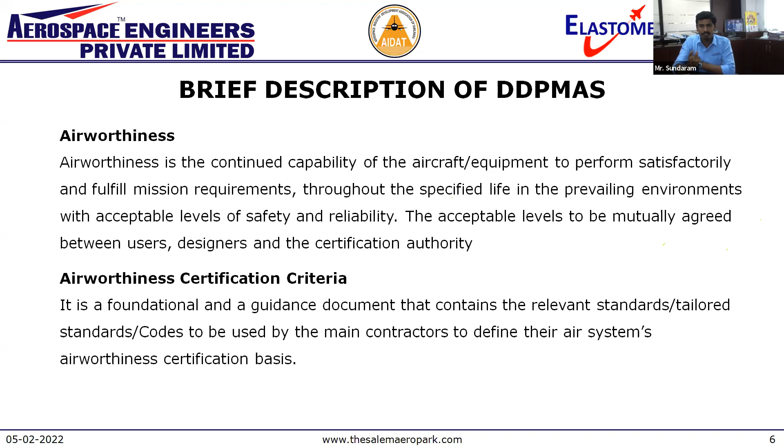The certificate of airworthiness concerns the system of individual air systems and their own certificate. For example, we are developing a product like an O-ring according to customer requirements, designing it based on drawing or raw material requirements. According to that, we do the qualifications as per the requirement, and then the certificate of airworthiness (COA) gets approved.

Continued airworthiness involves the task of carrying out verification of the continuous process, like type certificates. Subsequently, the organization must continuously fulfill the requirements while maintaining the approval. From the end of the approval, they must continuously follow the quality requirements of the military. Whatever customized standard we developed, according to that we must fulfill the requirements - that is continued airworthiness.

Airborne stores refers to aircraft, helicopters, engine systems, as well as equipment etc. for entire development and production. This includes the air engine system. Airborne store is a basic requirement for entering into the defense sectors.

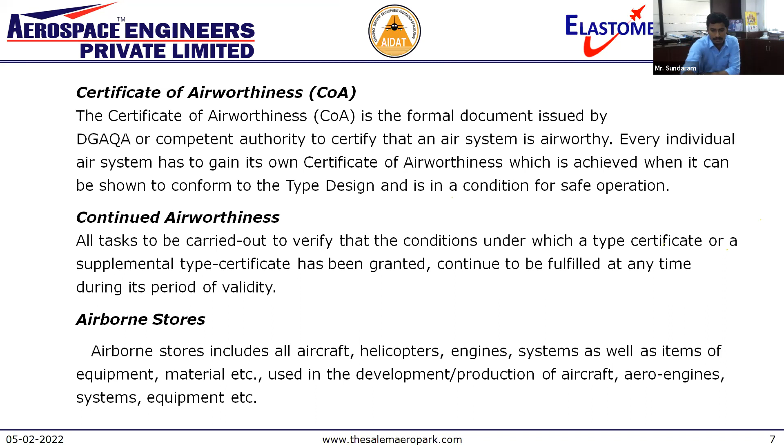Design and development agency - for example, our organization has a design and development agency for the military. We develop n number of components, both critical and non-critical products of aircraft, air engines, and software. We develop these based on customer or standard requirements, and we qualify them through the regulatory organization or R&D laboratory. As per the civil requirements, we qualify our item according to the development, and based on that we get the approval.

Design authority is majorly for R&D establishment. For the items that we develop, the design authority should be provided by RCMA or CEMILAC.

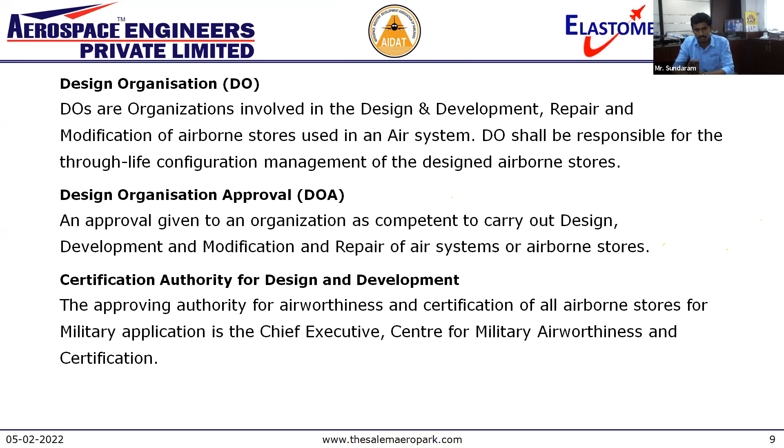Design organization - our organization is a design organization for the military, and that approval has been given by CEMILAC. RCMA is under CEMILAC. The air system and responsibilities should be based on our development. Design organization approval is subsequently equal to design organization based on the airborne stores.

POA is production organization approval. In the military side, the production organization approval is given for manufacturing and repair. It depends on how the organization develops and fulfills the requirements of the customers or military, based on specifications and how they follow the systems. Yearly, 2 surveillance audits are carried out for the POA. The POA approval is valid for 5 years, with surveillance audits carried out twice yearly.

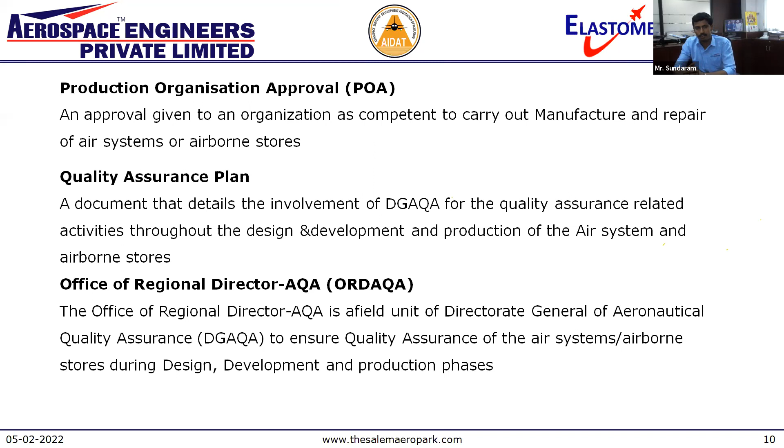Quality assurance plans are a major requirement for getting the military certificate, involving agencies like DGAQA, MSQA, and ORDAQA. These three agencies are the quality assurance agencies. They witness the process from the raw material stage to the final inspection stage, clearing the product according to specifications or customer requirements. Based on that, the item must be approved, and they provide type certificates valid for 5 years, now changed to 10 years.

So this is quality assurance. Quality assurance is entirely for developing and manufacturing the aeronautical products. In this military setup, there is one contract and subcontract agreement.

The main contractor is the developing and production agency, and the subcontractor is for developing the item. Our organization has been given the subcontract by the main contractor for the product. We want to evaluate our subcontractors twice yearly, and validate these contracted suppliers according to the DDPMAS requirements.

Then RCMA, Regional Center of Military Airworthiness, and CEMILAC. These are the main certification agencies. RCMA and CEMILAC have given the approval for all our components and compounds. So how has RCMA taken its role in this?

Initially, while we are developing the products or components, we want to provide the user letter from the customer side. According to that, we put one letter to RCMA with a CC to CEMILAC. Based on that, we provide the specifications or requirements along with that covering letter. We want to call RCMA for witnessing our process.

Along with RCMA, ORDAQA is involved, like a quality team. They witness our process step by step. According to that, we provide certificates, fitment checkup, functional test and performance test reports, which we enclose along with the QTP. The QTP should be given to RCMA and CEMILAC.

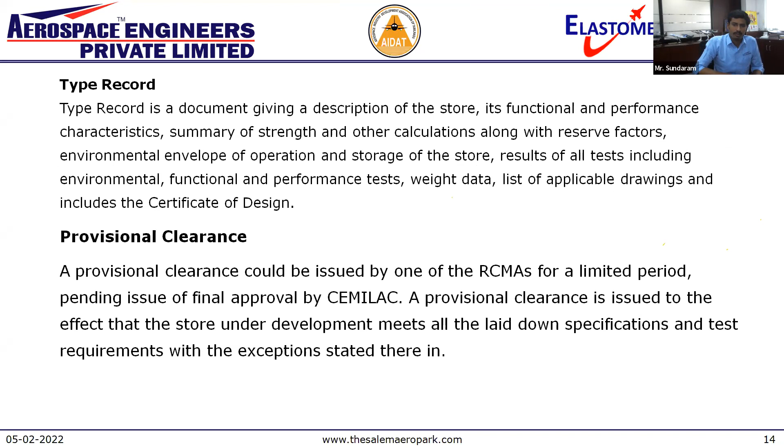So based on that, the designs will be certified. Then type record and provisional clearance. Type record is for military purposes, with a 5-year validity, giving applicable drawings for the compound and components. Provisional clearance has a 1-year validity, given by RCMA and finally approved by CEMILAC.

Then user acceptance. Once the type approval is given, it has a validity of 5 years. When we want to renew our type approval process, we need to get user acceptance, like performance feedback. For example, in 2015 we supplied one product along with RCMA approval with end use applications.

Then after 2020, we want to renew our approvals. We ask for performance feedback from the customer: where it is located, how it is functioning, how many functional hours, how is the performance of the rubber compound or metal product, how much load it is carrying. Based on that performance feedback, we can renew our type approval from 2020 to 2025. So every next 5 years, they provide the renewal process based on the performance feedback.

Then list of approvals. In military, there is a list of approvals for the process. For example, LTCC is Local Type Certification Committee. It is for critical and non-critical products, and it is a lifetime clearance; now there is no validity for this. So we can use it based on the application, like for ALH, LUH or all airborne stores. Provisional clearance is for critical products.

It has a validity of 1 year at the compound or component level, both metal and non-metallic. Batch-wise clearance is applicable for the non-metallic side. For example, while developing, we want to mix 3 types of batches according to different atmospheres.

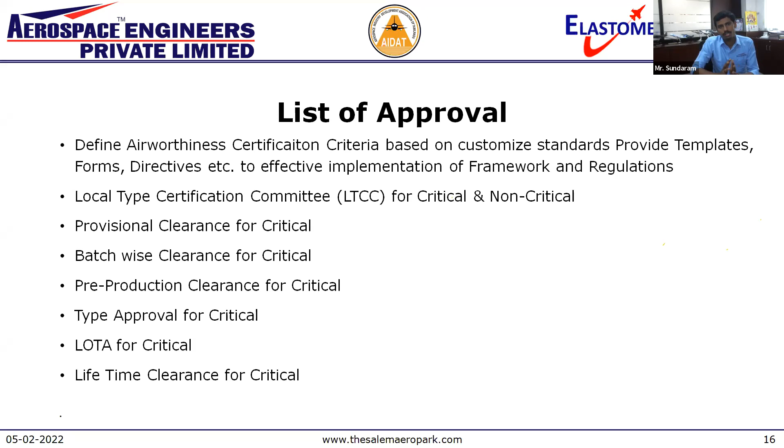Once the design has been changed from the particular organization, we want to intimate the RCMA or CEMILAC along with the following documents. Then the approval will be on hold. Before that, it is a lifetime clearance for the entire design, whether changing or not. Before that, it is a lifetime clearance.

Now we are entering into CAR 21. CAR 21 is a civil aviation requirement. Now the civil aviation requirement is fulfilled under CAR 21. There are n number of subparts, and subparts are saying about each process. So now the objective of CAR 21 is for qualifying parts and appliances for use in civil aircraft.

Then application rules and regulations. Aircraft Rules 1937 and Rule 57 say how we want to apply for applications for civil under CA Form 34, how we want to renew the documents, how we want to select and appoint stakeholders, what qualifications are required, and how many years of validity for approval for ITSO and subpart JD. Like that, the application rules and regulations say about the products.

Then categories of parts and appliances. The category of parts and appliances in CAR 21 says ITSO and non-ITSO are standard parts. ITSO is Technical Standard Organization, Technical Standard Order. This TSO says the requirement has already been given by FAA, so according to that we want to develop and fulfill our standard requirement.

Then ITSO will be provided by DGCA. This is overall approval for FAA. Overall approval is provided by FAA, and this we can supply in India. ITSO is an Indian Technical Standard Order.

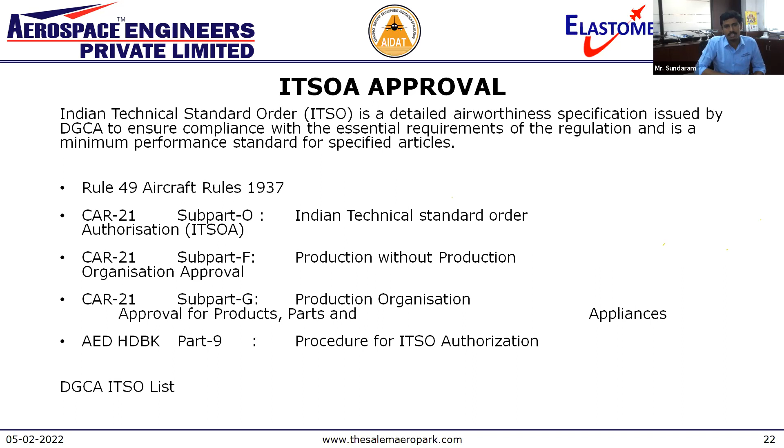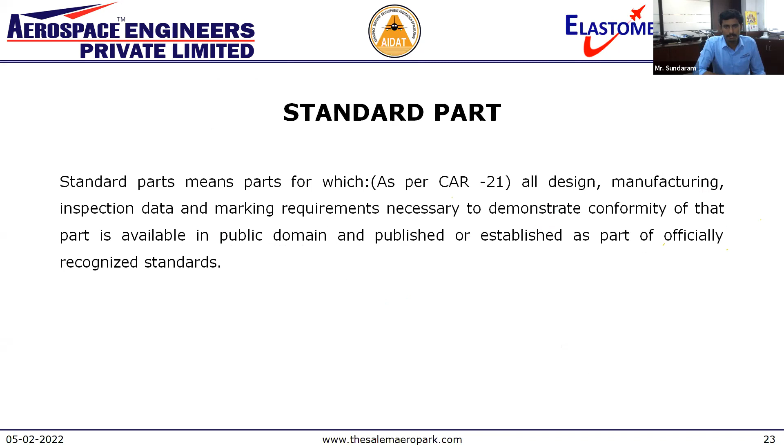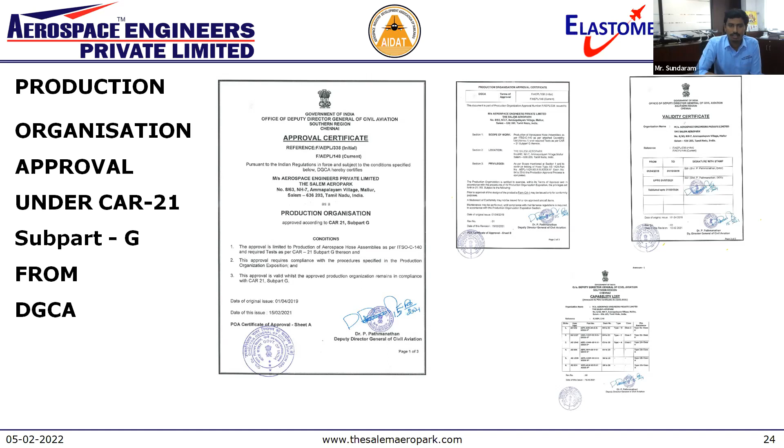These are the certificates that we got from the production organization approval under CAR 21 Subpart G from DGCA. These are the production organization approval, which was given by the southern region of Airworthiness. They issued the approval certificate for AEPL for the hoses and aircraft seals.

This is ITSO C140, which is for the hose assemblies, used in applications like hydraulic, fuel, engine oil, and airworthiness related processes. Then ITSO C150, which is for aircraft seals. We recently got approval for ITSO C150A, where we are supplying different types of profile seals, O-rings, and backup rings in PTFE and rubber material. We are qualified as per the ITSO C150A requirements, and our organization has got the ITSOA approval. So that's the conclusion.

Thank you, Prabhu. Thank you, sir. This is our presentation, and you've done a good job. Really, I loved it.

That's all for our presentation. So these approvals are all mandatory.

Everyone please mute if you're not speaking. Mr. Sundaram, would you like to share a few of your own experiences or words? Yes, ma'am, thank you, ma'am. Thank you very much, ma'am. Thank you. Thank you, sir. Thank you, my dear friends. If you have any query, we will take the questions at the end.

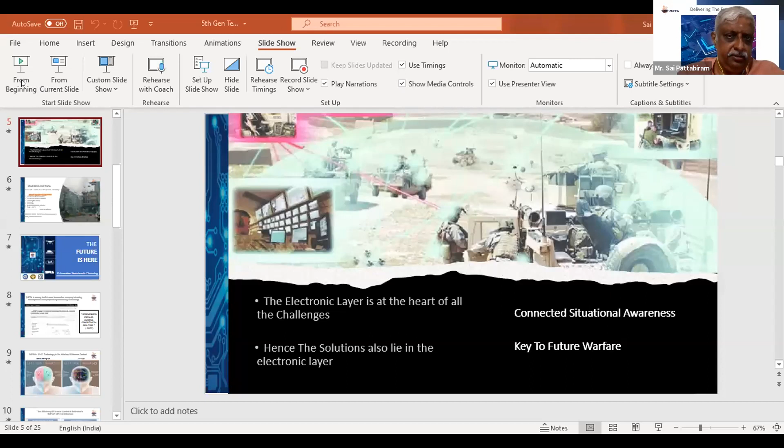So I'm really proud to be an AIDAT member, because AIDAT has been doing a lot of good things for the aerospace and defense ecosystem in Tamil Nadu. And there are a lot of stakeholders, along with now the Defense Corridor Initiative, like TIC and TIDCO, which are really supporting innovation and defense manufacturing in Tamil Nadu. So it's really a proud moment for me to be presenting on a program that is being conducted by AIDAT.

Now, if you look at fifth generation technology, in the civil world you always talk about 5G, and normally the moment anybody refers to 5G, we immediately talk about the telephone network. But that's not the case. The telephone network is only a part of the entire process of the fifth generation. It starts from collection of data from things all the way up to delivery and analysis of data. So that is also going to be a critical factor that is there in defense as well.

And one of the critical things that fifth generation technologies would be doing is enabling remote operation, and remote being able to attack from a position which is not known to the other side.

Now, the electronic layer is what has caused all these challenges. As you see in the case of the Armenian-Azerbaijan war, the electronic layer enabling control, being able to see the enemy without being seen, being able to attack the enemy without them knowing about it, being able to control an unmanned vehicle at a long distance and use it with precision - these are all functions of the electronic layer that I had talked about earlier. So hence the solution for this also lies in the electronic layer, where connected situational awareness is going to be key to the future of warfare.

Connected situational awareness would require a lot of data points, both image as well as basic data coming in from various different sources, getting them together. Sources could include unmanned ground and aerial vehicles, loitering munitions, wearables, augmented reality glasses, tanks, APCs, armored personnel carriers, and a whole lot of equipment used. All of them would have to be connected for every person taking part in the operation to have a complete awareness of what is going on around.

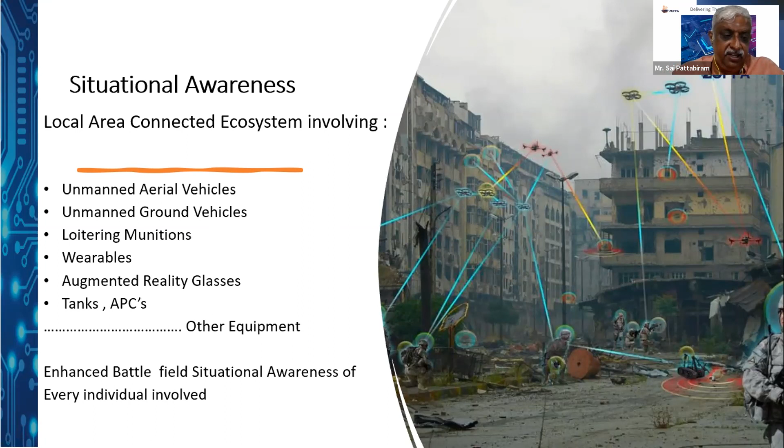Situational awareness in terms of the use of RF is also going to be a critical factor, as I had mentioned earlier. So enhanced battlefield situational awareness for every individual taking part in the operation is going to be critical.

I'll give you a kind of case study, because something futuristic can only really be understood when we're talking about whether it is being done today or whether it is in the process of being done. If you talk about something very futuristic without giving an understanding of what exactly you're talking about, it's hard to grasp. So I'm presenting the case of Zuppa from the perspective of a case study on the various things we have done in the area of situational awareness.

Just to give a brief background, Zuppa is recognized by the Department of Science and Technology as one of the most innovative companies. We have our own patented, proprietary system of control computing. This has been filed for patent on the Indian side and it's been published on WIPO.

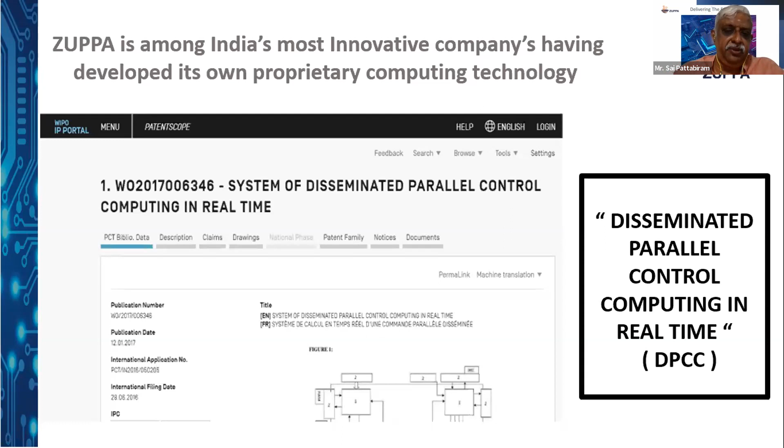Now, what exactly is the DPCC? The DPCC is an artificial intelligent replication of human intelligence. Suppose you were to go from point A to point B, planning to go from your home to the airport. Various things happen along the way. Some require an immediate reflex action without really thinking too much, and others require longer term action to plan your route. So we have practically replicated the human brain's functioning in an electronic chip, and it works in a similar way.

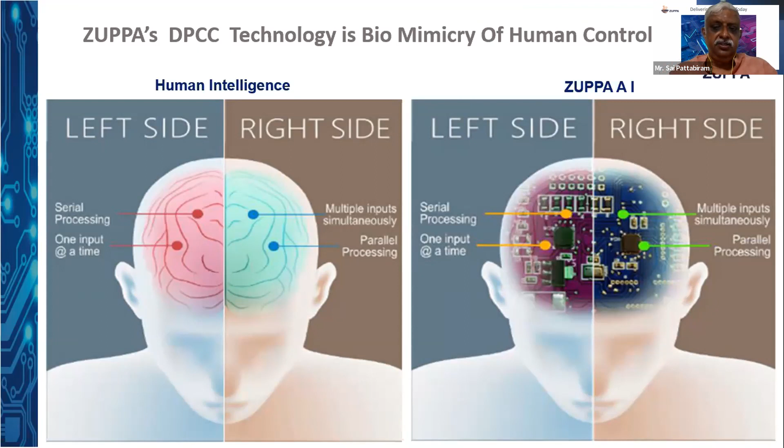We found that due to this, we've been able to get much better efficiency. We've got a 10x increase in throughput and a 25x increase in output correction frequency. So these are some of the technical aspects.

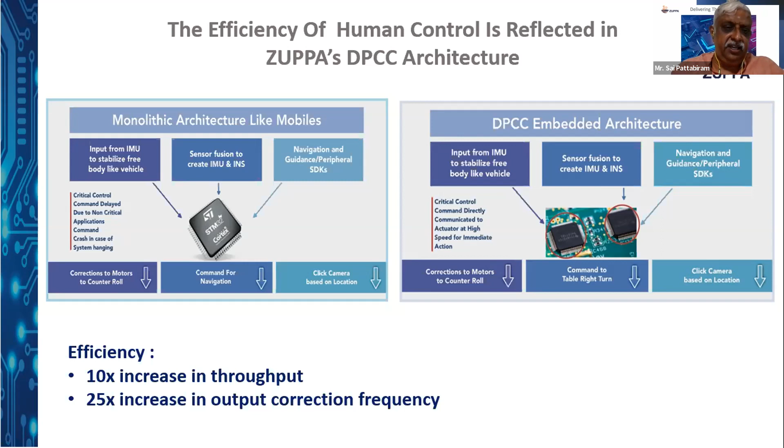Now I'll go further into the application part of it. We've used our technology specifically in three areas. One is the Navgati autopilot, which replaces man in an unmanned electronic control system. Then we've used the DPCC technology for real-time throughput of image processing, done for the see-through armor, which we did with our partners Big Bang Boom. We're also looking at using it for vision-based systems in defense. We have used it in automotive applications, automating tractors at various tractor manufacturing organizations like John Deere and others, for driver-assisted or driverless capabilities.

Now, during the process of working with an autopilot, we use GPS-based navigation. So if we can navigate and control a vehicle remotely using GPS, we can also collect data and transmit it wirelessly. We used that to create the edge computing device, which is a data accumulation device used in industrial IoT, asset tracking, and connected mobility.

Now, this is something that even defense is now interested in, primarily because we are talking about the Internet of things on the battlefield, as well as what you would call the Internet of military things. And that's part of the situational awareness factor.

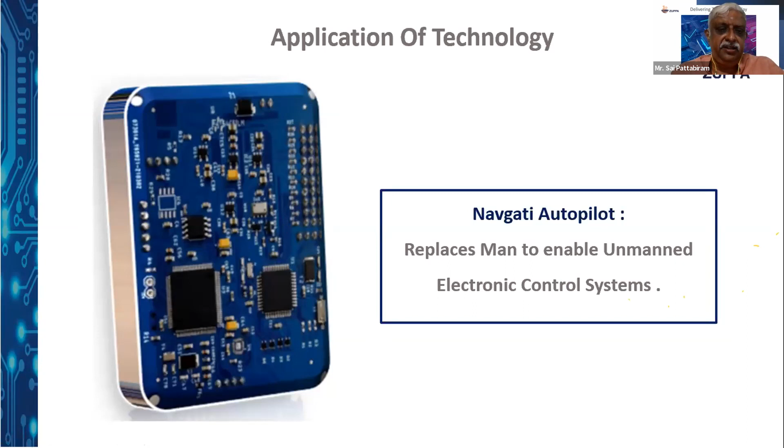So the Navgati Autopilot is a fully indigenous product, and it has an application interface called ZAIP, on which applications can be built using SOMs or SOCs like Raspberry Pi, BeagleBone, Arduino, or even your own SOM, to expand the applications and use it for specific use cases you might want. We are already working with organizations like DRDO and a couple of private organizations on this product for drones as well as for unmanned ground vehicles.

So it is a very low latency system, primarily because it works very similar to the human brain. It's got one core that completely handles only reflex action, and the rest of it handles planned action. Thereby, we've been able to split the autopilot's abilities to control the unmanned vehicle.

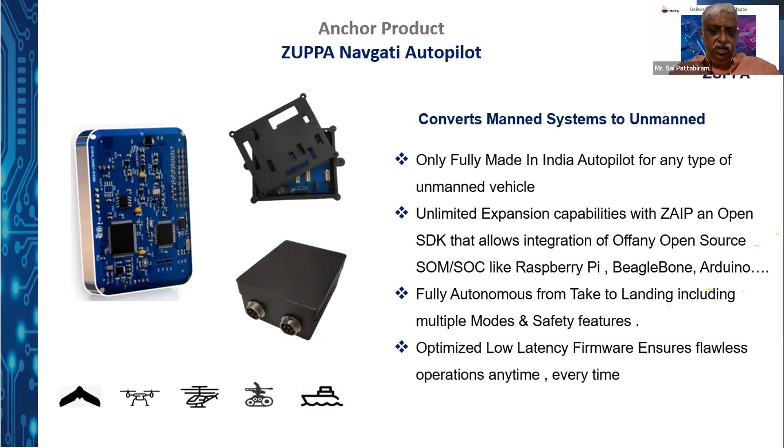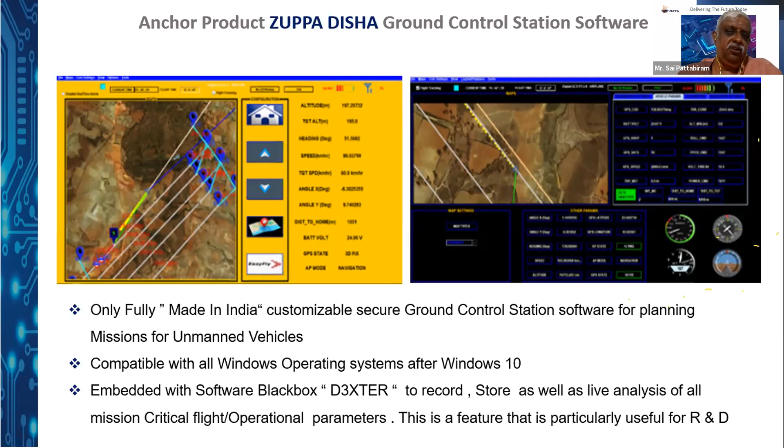Now this is the ground station, because every one of these things require remote access. You have to be able to command it, you have to be able to track it. So all this is done on Disha, our ground control station software, which is again purpose-built for the Navgati and is a completely indigenous product. It has an embedded software black box which records a lot of your parameters, so even if you have certain untoward crashes with your drone, you can analyze and figure out what has gone wrong and where the problem is.

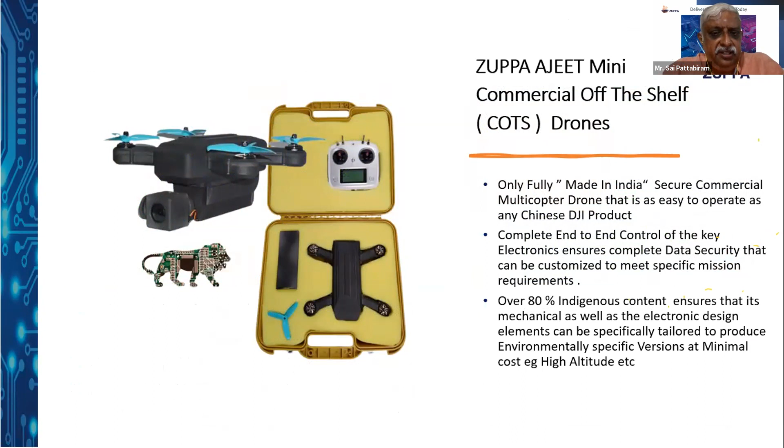Now, this is going to be a product that we are going to be launching very soon into the Indian market, specifically also targeting the DJI drones that are there in the defense ecosystem. Plus, it also has civilian applications in the form of training drones, for surveying and mapping, for videography, for surveillance, and various other applications.

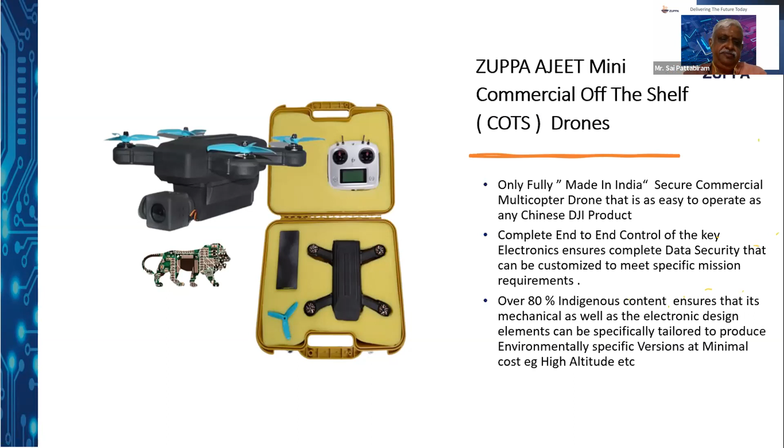So this is basically a commercial off-the-shelf drone, which means you can buy the drone as a box, you don't need to order it and wait for it. And this is exactly going to be, in terms of feature as well as price, very similar to any of the DJI drones. It's a completely indigenous product, having a completely indigenous autopilot. So thereby, of course, initially there are some foreign components, but over a period of the next 6 to 8 months, we're looking at indigenizing most of the electronic components, barring those that cannot be made at scale in India due to availability of raw material or the scale of operations. But otherwise, the rest of the drone is fully indigenous.

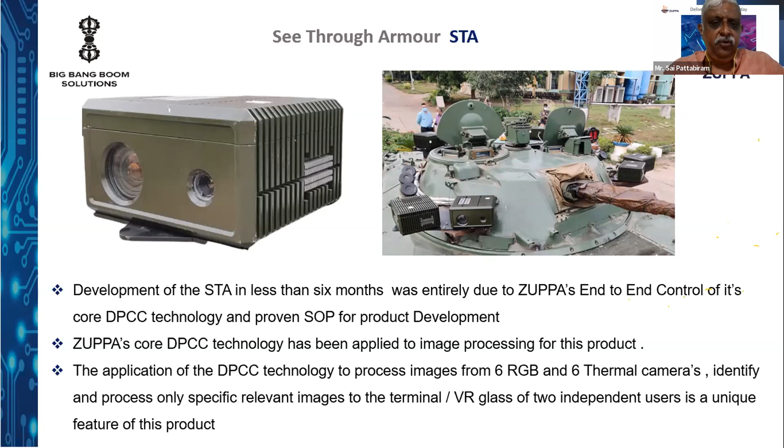Now, this is a product that we developed in less than 6 months, and this is where our DPCC technology has been used for image processing. The latency levels are so low that actually a 15-ton tank can be driven by even looking at the video feed alone. This is an interesting product because it builds a 360-degree capability thanks to 6 camera sets. It allows the commander and the driver to get different visualizations as they want it and in the direction in which they are looking.

In addition to that, we are working on a visual radar for anti-drone, which is again based on the same STA kind of technology, where we are looking at a long range of about 3.5 minimum kilometers on a decent day, and on a good clear day, possibly even up to about 7 kilometers. We are using block cameras in these to be able to zoom, with cameras covering the entire 360 degrees to spot those.

This is primarily being developed because one of the key factors in anti-drone is really detection of the drone. Once you detect it, there are a lot of options for neutralizing it, but detection from a very short distance doesn't help because of the speed at which drones travel. It practically is on you even before you detect it. So this is one of the products we're looking at developing, a visual 360 radar.

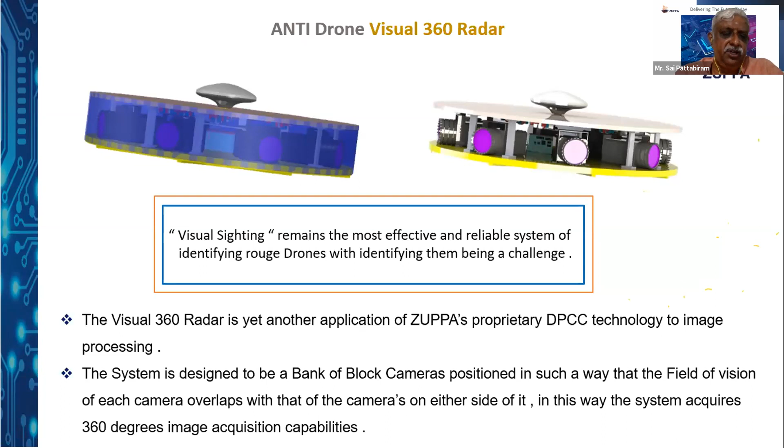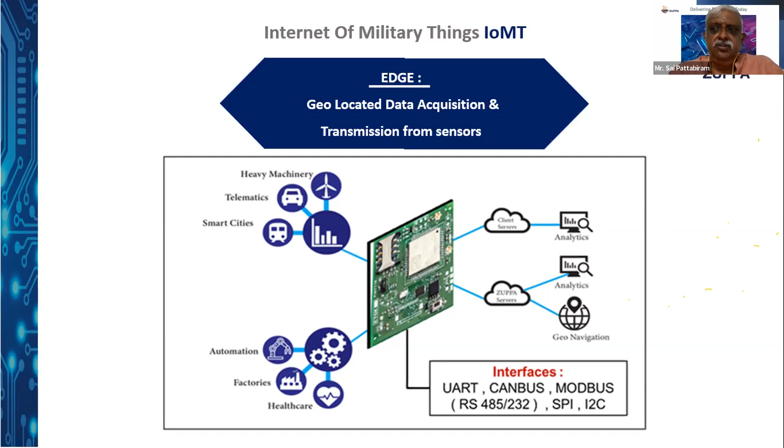Now coming to the edge device. This is something we are already working on in the civilian sector. We've sold over 8,000 pieces of these, operational across various applications like cold storage, cold chain logistics, simple vehicle tracking, as well as monitoring of industrial IoT solutions on machines. It was also used for the cold chain for vaccines.

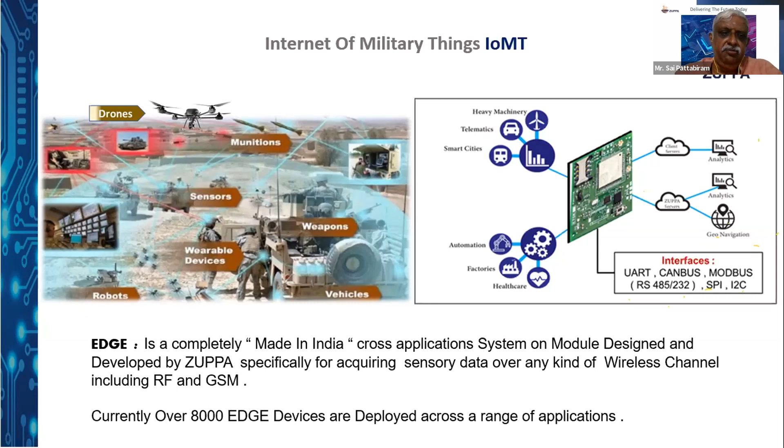Now we are working with customers like Jio and Bosch and others on the civilian side. This is particularly of interest to the military side because it would be the connecting factor in terms of situational awareness, connecting various assets and helping frontline forces identify friend from foe based on certain patterns that emerge. This is something the military is already interested in, and we are already in discussions with them.

As I mentioned earlier, detection of RF frequencies is also another critical factor. So we have worked on an RF detection finder, and we have demonstrated it to some defense units, and it has been appreciated. We've done it at the soldier level, but it has the potential to be scaled up to much larger levels.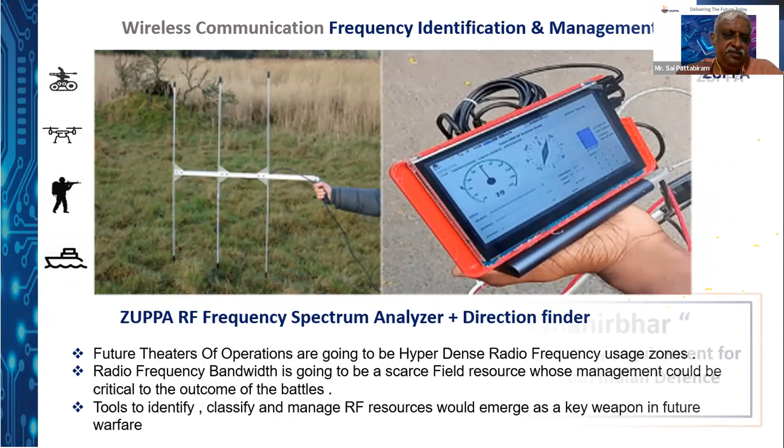So Zuppa, as such, we envisage ourselves emerging as a chip level company at a future date. We see ourselves as one of the companies who would be making semiconductor level microprocessors, because both the edge device and the Navgati can be scaled to the semiconductor level.

One of the ways forward we are working on is looking at working with members in the AIDAT space as well as other people in defense projects, to work on Make2 projects where we work on the core electronic part of it.

We can work on drone projects together, where the autopilot could be there. Data centric projects could also be worked on where our edge devices can be used to collect data. I think collaboration among stakeholders is what is critical for making these products in India.

I think the huge opportunity in Make2 as well as in other areas, making components and indigenous substitution, import substitution - these are all opportunities in the defense space, and this is something we should be looking at jointly, seriously, with a lot of companies.

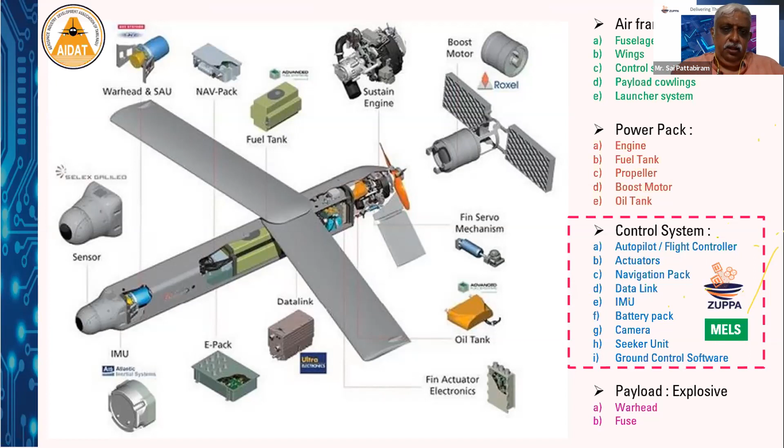I would also like to add that as a supply chain, we are into electronic manufacturing. So anybody who would like to work with us on the supply chain in terms of components, PCBs, or system design, we are more than open to work with.

The other thing I would like to mention is that from these slides, I've given a general understanding of what 5th generation technologies and the opportunities it holds. I definitely see a huge potential for India to grow in this space, because most countries now are contemporary with India in terms of position in the 5th generation space. No country is ahead of us. We are fairly close behind, if not equal to.

So I think we should be looking at a fairly good level of business opportunities in the 5th generation space. Companies looking at growing in this space, whether for batteries, exoskeletons, or electronics, have huge potential, and I think we should move into that area, because it will also help Indian companies leverage exports, which people like Mr. Sundaram are already doing with companies like Boeing, showing us it can be done. I think the new areas is where we should be looking at taking it forward.

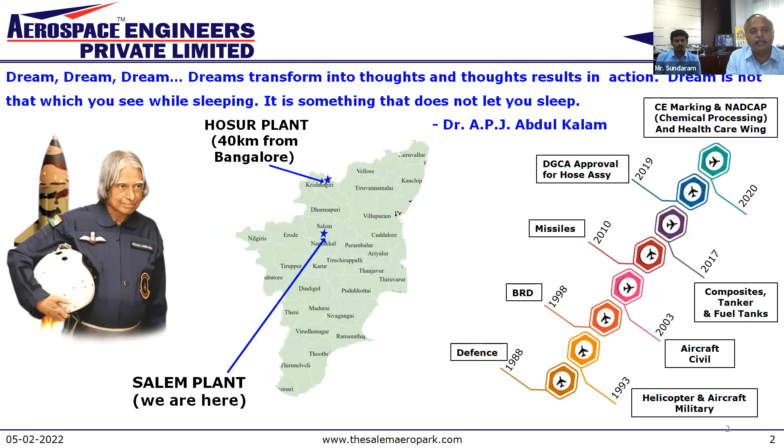Yes, and these are all the certifications we have: AS9100, ISO 14000, 45000, NADCAP, NABL, ITSO, DGAQA certified, CEMILAC, CE marking. And fortunately, thanks to government in 2020 and 21, we were also making healthcare products like ventilator parts, sir, and we got ZED gold rating from Government of India. And these are all the departments available: R&D, high precision rubber parts, composite molding, LRUs, testing facility.

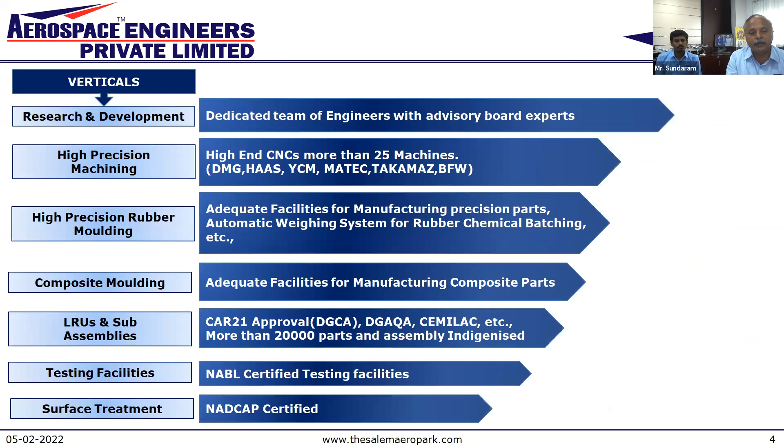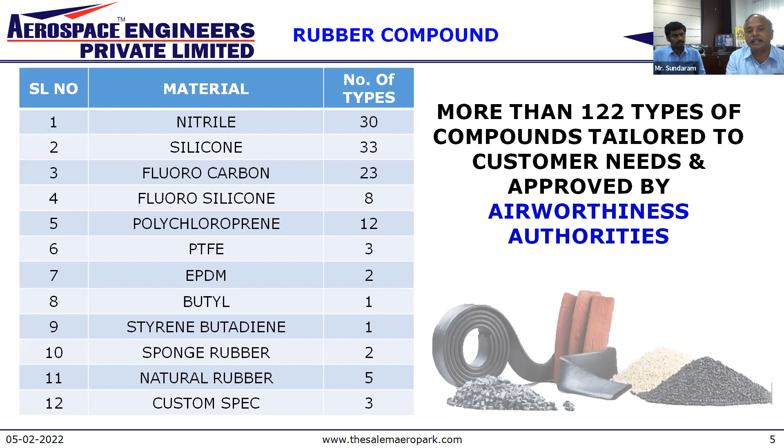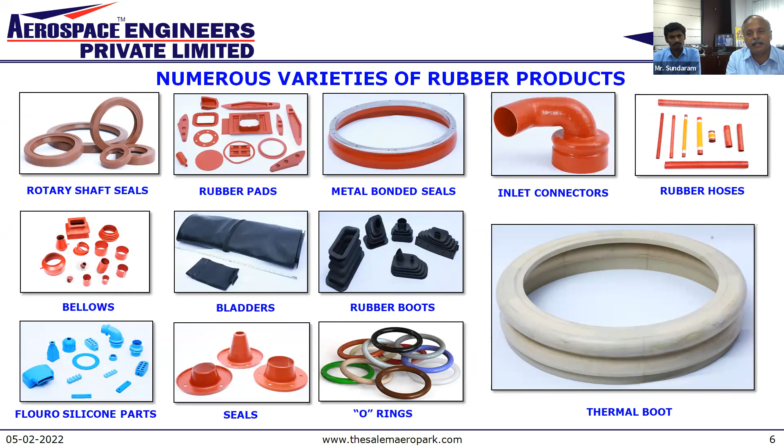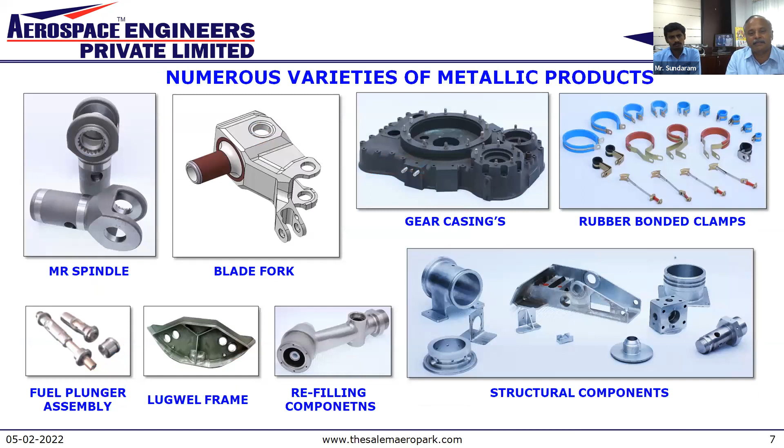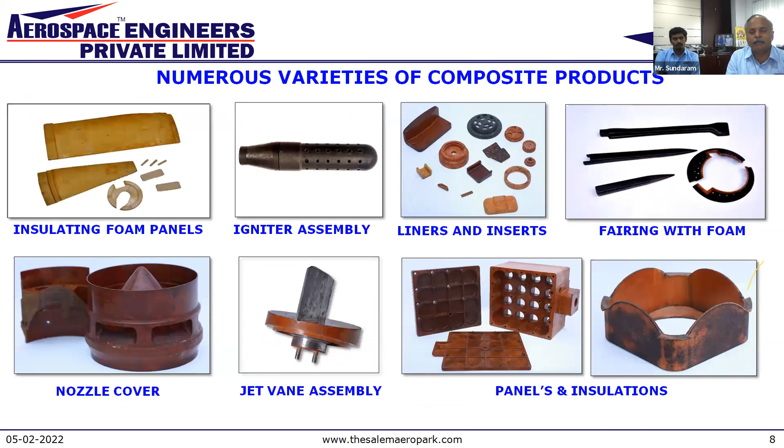And many products are bladders and oil accumulators, rubber profiles, thermal boots for space agencies, and the rotary shaft seal. These are all the LRUs for helicopter, aircraft, Sukhoi aircrafts like that. These are all the composite components for BrahMos, Akash, Agni, LRSAM missiles, and other missiles also we are doing, sir.

The seals are inflatable. When we are closing the cockpit, automatically the cockpit seal should be inflated, and the cockpit should be pressurized. It has to take care of the cabin pressure for a whole flight of 4 hours, 5 hours, 6 hours like that. And we are giving guarantee for 800 flying hours for our cockpit seals. In the test rig, it undergoes more than 5,000 cycles, usable life cycles. So then we are giving guarantee for 800 flying hours.

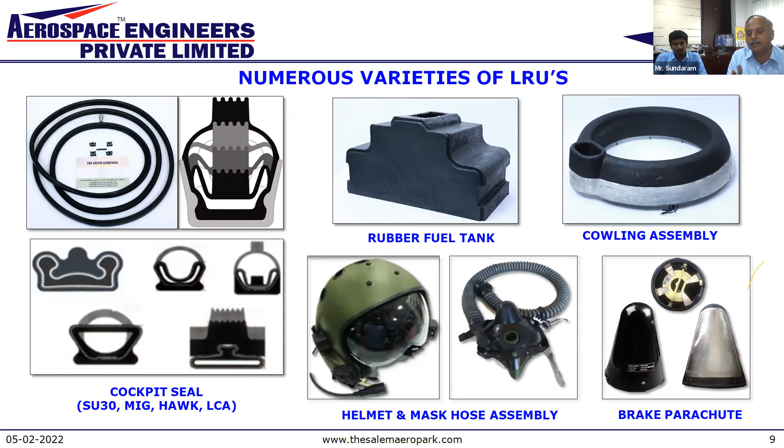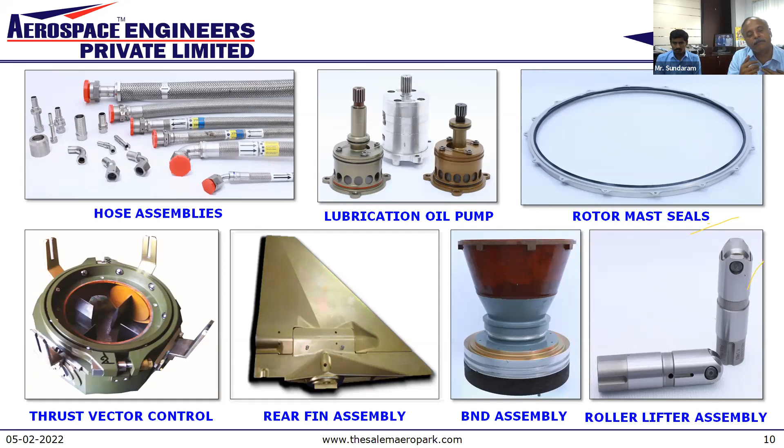Next, the hydraulic hoses and connectors for the hose assembly, thrust TVC assembly for missile direction - it takes care of the direction of the missile - and the rear fin assembly for the Boeing 777 aircraft, it's a Boeing part. And the BND assembly, booster nozzle diversion conversion assembly we are making, roller lifter assembly for the export project, and the rotor mast seal for advanced light helicopter, lubrication oil pump for all the fighter aircrafts and helicopters, jet assembly, like that - so many assemblies we developed, sir. Gearbox mount, solenoid valve assembly, actuators.

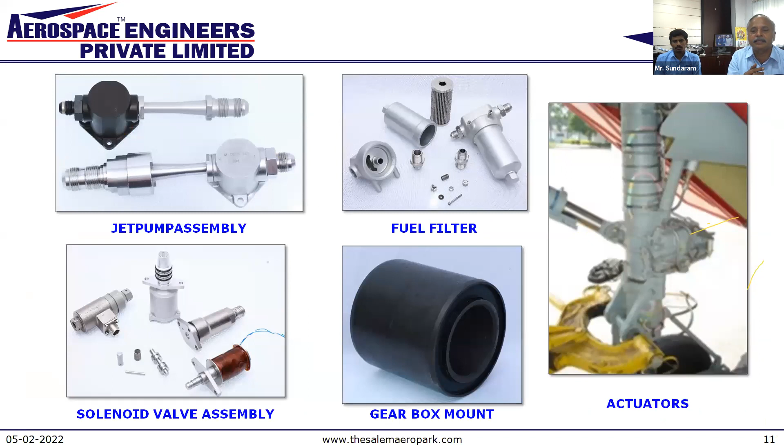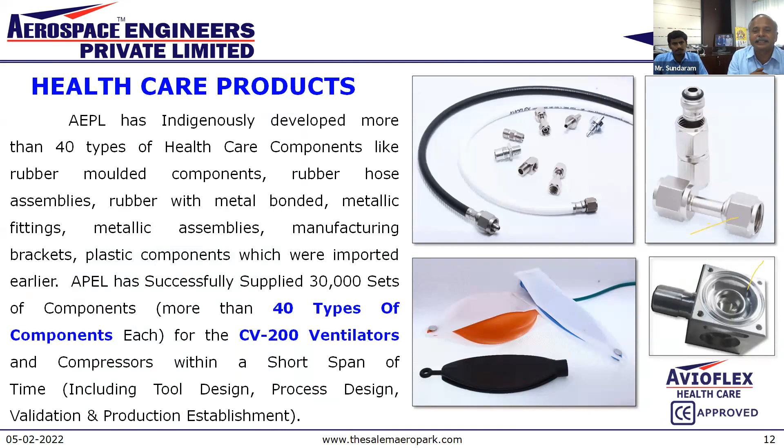And this advanced technology division - we are into underwater swarms. AUV we are developing, and we are working with NSTL for the underwater swarms.

And we received 14 awards from various agencies, 3 from the Honorable Prime Minister of India, and other activities - they're all encouraging. We started with Hindustan Aeronautics Limited, and presently we are having customers like this.

And our upcoming project in Hosur - we have a 3-meter machining facility, and we are making some wings for one missile program.

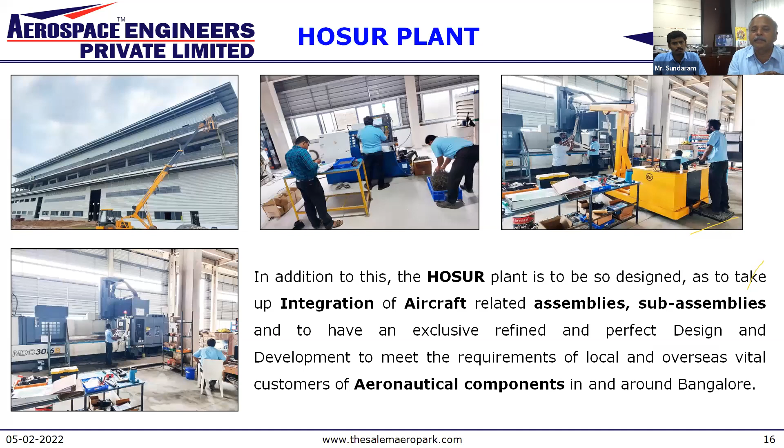Having 2 units at Salem and so on, we are very much happy with India - maybe the hub for world market, and we are having a bright future for our Indian environment.

Fortunately, Tamil Nadu - we are expanding more in Hosur. We are expecting more support from our government. Government also - Tamil Nadu government is giving more support through TAEC, TIDCO.

They are funding like anything, and our present CMD, we arranged 3 programs, sir - Salem program, Trichy, Madurai, Chennai, and shortly going to happen in Hosur also. For the defense corridor, they are giving more and more support.

It's a great time for our friends who can join in the aerospace and defense sector and strengthen the Tamil Nadu defense corridor, and make many products for our Indian skies, stop imports, and we can start exporting also.

Even usually Dr. Kalam - I was with Dr. Kalam for 7.5 years, sir, before presidency. And he was usually telling, learn from India, learn from abroad. So we can learn many things in India, and we can make use of the technology, and we can manufacture the product and stop imports, and we can export the product and get profit, business value, from abroad countries.

Friends, I want to say only one more minute - because of the CEMILAC certification and DGCA certification, the Middle East countries and African countries, they are accepting our CEMILAC certifications. As long as we are having the CEMILAC and DGCA certification, we can add on a small test, and we can convince the African countries. Through this type of activities, we convinced the Egyptian Armament Authority, and we secured an order in the year 2020 for a period of 5 years.